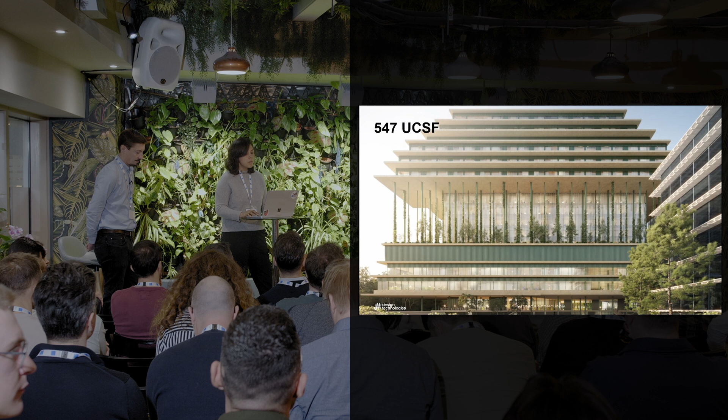And we are part of the design technologies team. So the design technologies team is within Herzog de Meuron, sort of looking at the intersection between the design and technology. So we focus a lot on the process of all the projects.

So we go from sketch to the final product, like everything that happens behind the scenes, like how is the process working. We are kind of involved in that.

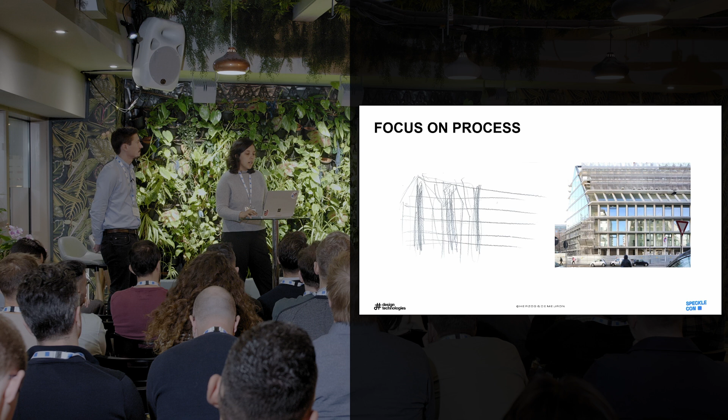And we are divided as a group in 5 different domains. So we do project delivery, which is BIM, computational design, typical computational design scope. Then we have the visual artist. Building analytics is the latest addition, which takes care of sustainability and performance analysis. And then we have workshop, which is both a physical workshop and digital workshop.

And we all work together as a sort of, even if we have different groups, we work as a collaborative kind of group on different initiatives. So there's always a bit of involvement from a person from the different fields in different initiatives.

And what we are mainly going to look at today is our challenge that we have as a group, sort of with data. And this comes, this is like a global problem within the office. And this comes basically from the fact that the type of projects that we have are very varied. So we don't have one specific scale or one specific typology that we are kind of bound to. We range from kind of the design of little objects to master plans.

And in terms of typologies, we do a little bit of everything. And when you work in an international setting, of course, what happens is that you cannot really define a standard for any of these projects.

Also because of the type of design that we do, we are very experimental in terms of solutions, materials, facades, etc. So it ends up being sort of everyone wants the same, but it's always a bit different. So the same, but not. So also when you think about BIM standards and with different clients, you end up with this kind of problem.

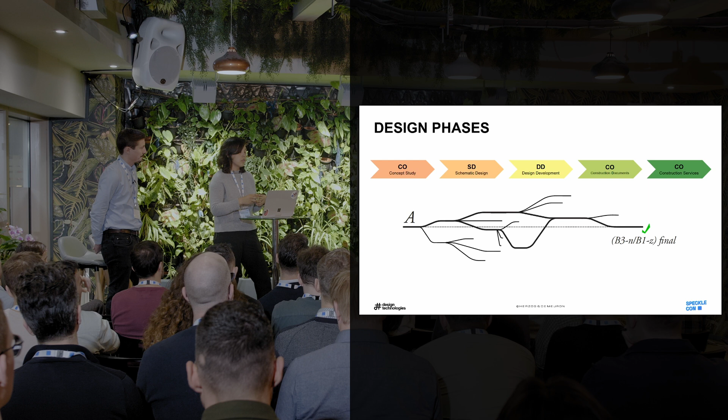And then when you think about the data production throughout this process, it just gets kind of exponential. So at the beginning, you maybe start with just a couple of models, but then by the end of the project, you already have kind of like a mess of all this data that you have produced.

The question is, how do we manage this with the tool ecosystem that we actually have in the office? We produce this data with many different add-ins and software, and in the end, where is this data living, and how can we take it and compare it if it's not standardized at all?

So we started looking at the way the design data process works in the office right now. It's very typical: you have a folder where you put all the start files, and then you begin the design process. At some point you start producing a lot of data through iterations or analysis of this and that. Then at the end of the phase, you pack it all up and put it in a folder, ending up with single files just saved in this folder structure.

And then you can't really do anything with it. For us, that's a completely dead end, because throughout the entire process you lose some of the data. You don't really know where it comes from, and there's a lack of transparency on how this data was produced. Sometimes there's inconsistent data, you can't compare it, and there's always the software versioning problem, where you want to look at what happened in a file from 2021 and no one has that version installed anymore, so it's always a struggle.

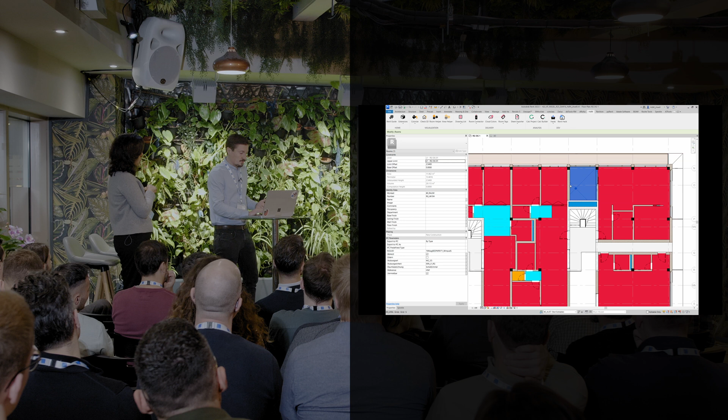Of course, we want to also see that live in a little presentation here.

So we have the Revit model. We use the standard Speckle connector, which is connected to the setup project. We send only the room data in this case.

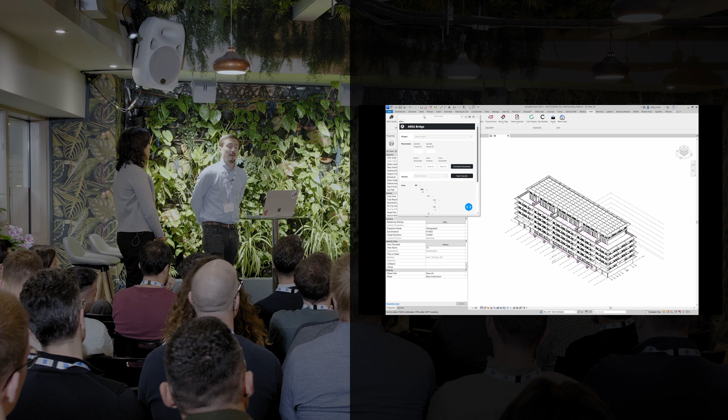Then we have to utilize the Area Bridge app, which is a web app that we start here directly from Revit. Here you choose the area configuration. This project configuration knows its Speckle project and model, and it knows the parameters that it has to evaluate.

And you see the versions in Speckle that you can query here. By selecting one version, it automatically calculates, or it can calculate the area values, and then you can save this as a new milestone.

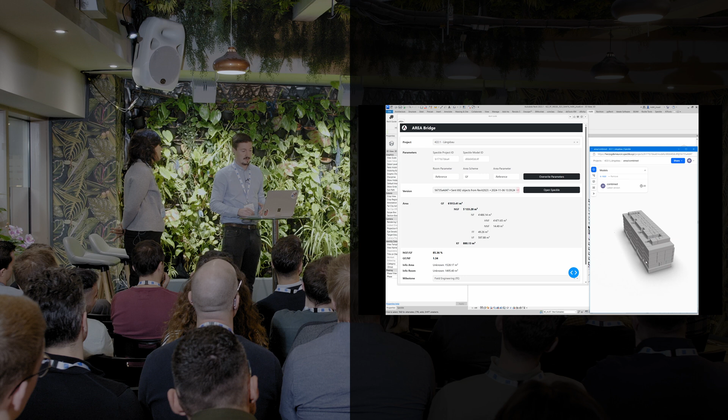So in this case, we save the latest commit as the field engineering milestone. So we have now a DD milestone that relates to a certain model, and here the FE milestone that knows its Speckle model that relates to it.

What is the result of this? The result is a very clear, organized database where you have a relation to the project. You have the milestone that you defined as a user that relates to the Speckle version ID and the URL, as well as the calculated area for each of those snapshots.

This makes this data comparable. We have basic area data for all metrics. We have a complete set of data because it's organized by milestones, so we can go back and forth in time per project.

We're flexible because we always have the geometry and the milestones that we can reassign, and it's updatable via this area app. And it's transparent because it's verifiable, since we can go back to the Speckle model and check what the actual geometry was where we got the results from.

And so now I'm just going to talk quickly about the second case study, which is CALC. It's our embodied carbon calculation tool that we developed in-house. So what is CALC? It's basically just, as I said, to calculate the carbon emissions of our buildings.

So it's a very simple method of calculation. We are focusing on the embodied carbon, so the beginning of the phases. This was never meant to be a tool that replaces any of the existing tools in the market. You will see how our approach and thinking worked.

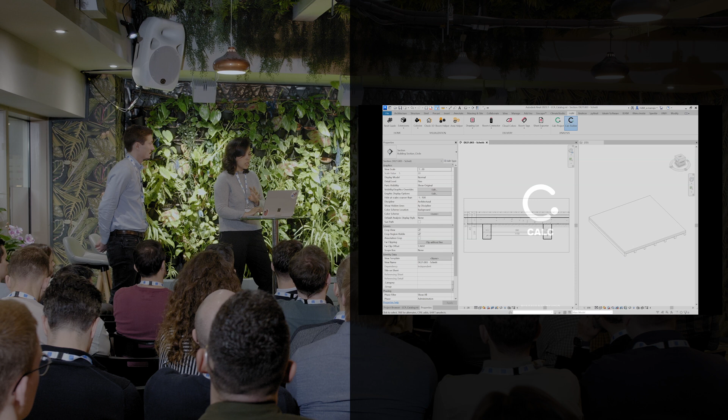You do different snapshots, and in each one it gives you a file with very raw results that include everything that was in the calculation, including these assemblies we were talking about. Let me give you a very quick preview, it's a bit fast, just so you understand how this calc environment looks like.

So you can create the assemblies. In this case it was already saved, but you tap into all the materials that are part of that element, and then you can apply one or multiple materials to it with different ratios. You save the performance information that is saved as parameters in the elements.

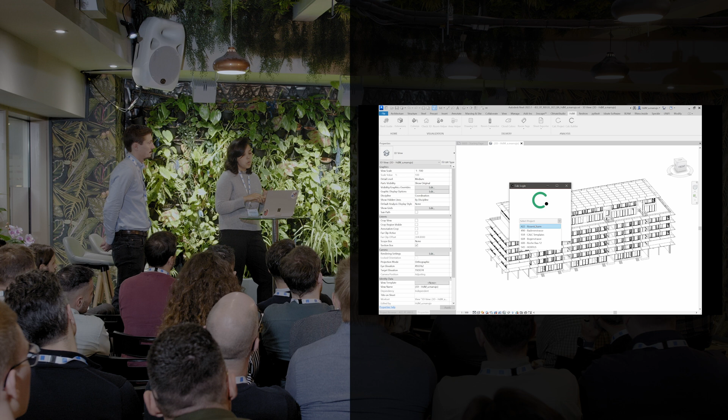Once you upload it, this element becomes available for the project team to do a calculation. We have a way of filtering and grouping the model, and these are the project settings that get grabbed from Directus.

In the end, you can have a very detailed model that will map specific elements, or you could have just a box and take either areas, volumes, count of elements, or the length of the element, depending on the unit assigned on the assembly.

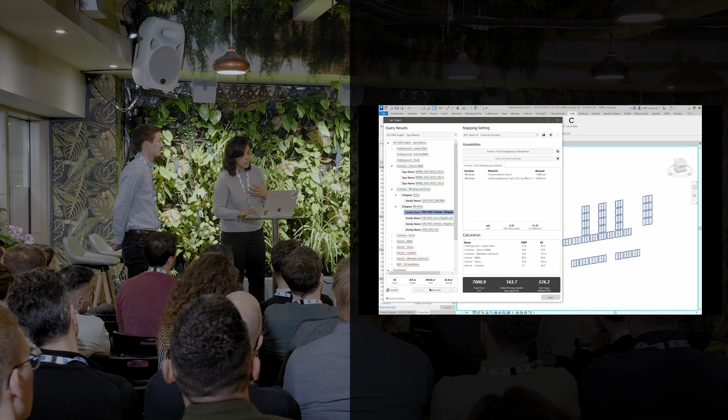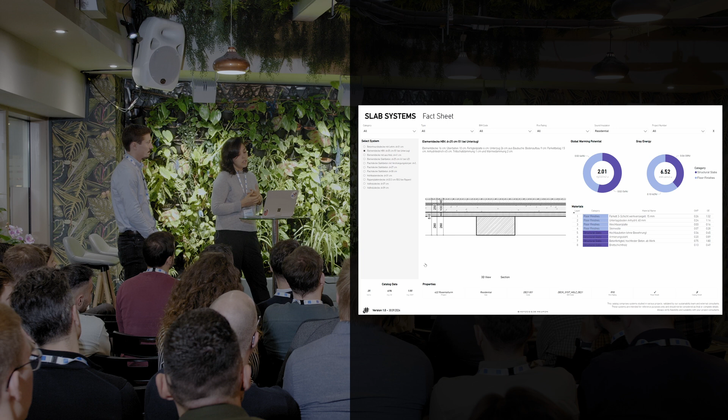This entire process started another thing we wanted to make available for the office, which is our knowledge base — a web-based tool, also based in Power BI, like an assembly library the teams can look through, where they can compare elements and see everything included in that element, how they compare to each other, which project it was used in, what program it was, basically giving the teams full transparency on what is being done.

This was something we saw as very necessary, because the LCA calculations were being done mainly by our team. We kept seeing PDFs of repeated calculations, referenced from another project by the teams, and there were just so many things that were wrong.

The calculation was including something it shouldn't. So we decided that this is the approach the office needs to take from now on: centralized, transparent, and shareable.

In the end, our goal was no more PDFs — centralized, accessible, and updated, with easy updating. It should be comparable so that benchmarking is possible, and it should be flexible so it can be transferred to multiple sources, not just live within this dashboard.

It can also be pulled back into Revit, or pulled back into Rhino, and the team can start making variations of that. Then when it's a final product, we send it back to the library, and it lives there as knowledge sharing.

And it's transparent — you can see everything that is part of the calculation, and you can track the process all the way back to the beginning.

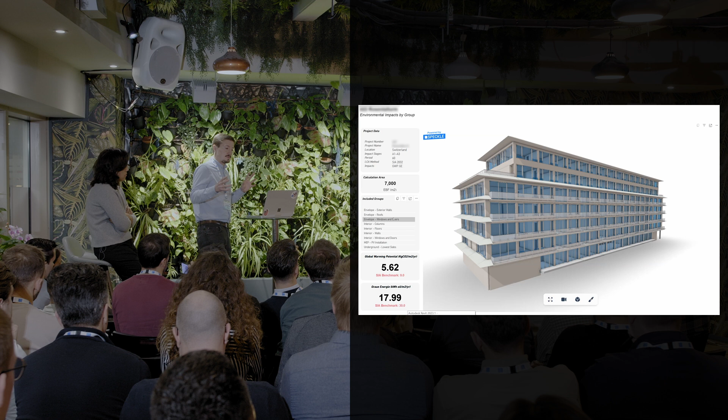Before they go into maybe a detailed look at specific metrics. And this should make also the data and snapshots that we saved transparent for the user, because the database is not very visible for the user.

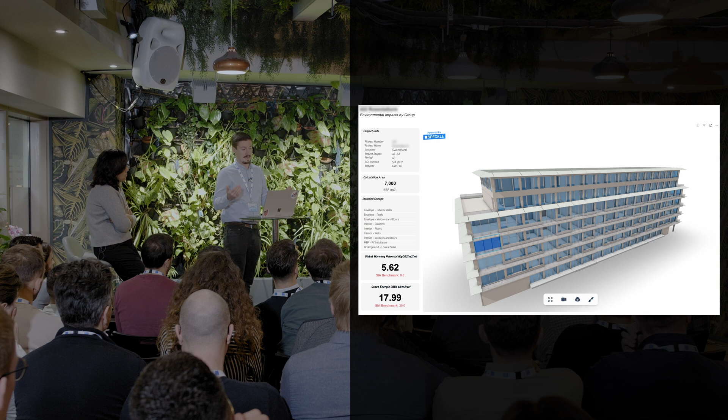But here, in combination with the Speckle model, for example, we can very clearly see where is the global warming potential, what are the numbers. They are also related to the calculated area from this area use case study that we've shown before.

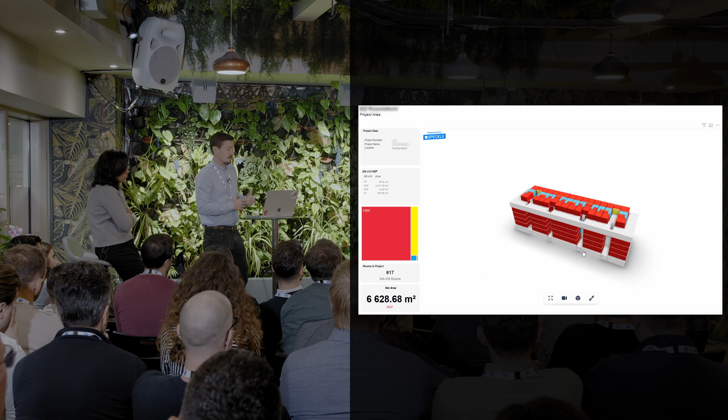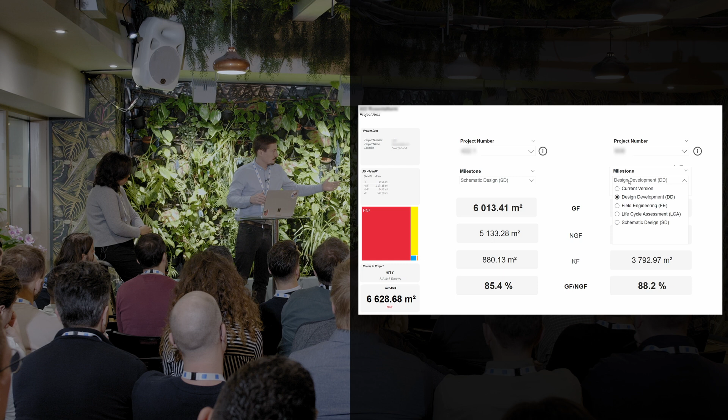Which would look maybe on the next page like this, where you of course have a Speckle connector also for specific project analysis, but especially also having the possibility to compare different projects and different milestones of a project, maybe not only the overall area, but also the efficiencies of different projects. Of course, always related or linked to the actual Speckle model from where the data comes from.

Just quickly an overview of how we want to organize these two parts. On the top, we have the Speckle project repository, where we divide things into different folders for area scheme models, project setup models, design versions, LCA calculations, and GIS assets.

And on the other side, in Directus, we have the related snapshots, or data tables that contain certain information, but they are always related to their Speckle model and know the ID and the current version of the Speckle model, so that we keep the connection between these two platforms. So this is our back end, let's say.

And then quickly about our next steps, we want to finalize and publish the project platform by adding content of all running projects. We want to use the assemblies that Aida showed not only for the calculation of the LCA values, but also as assets for Rhino and Revit modeling.

We want to develop the use case for the operational energy of projects to include that in the project platform, improve the GIS asset library, and use potentially Speckle Automate to make some of those processes even more efficient.